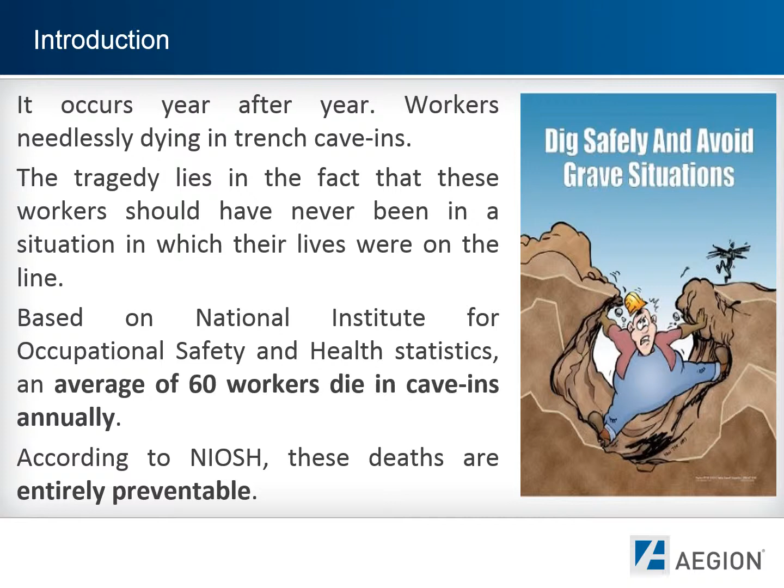Let's be clear, these events are not accidents, as cave-ins are both predictable and preventable.

Types of hazards: fatalities are usually caused by an absence of trench protection, as some employees may risk working in an unprotected trench to save time and money, cut costs, or due to supervisory pressure. A lack of knowledge is another factor - some employees are not aware of the hazards and precautions required to minimize the risk of a cave-in.

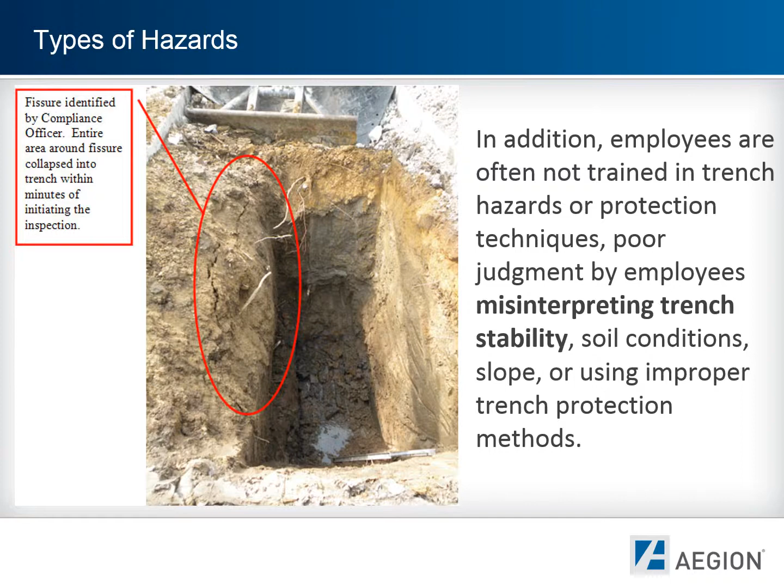In addition, employees are often not trained in trench hazards or protection techniques. Poor judgment by employees misinterpreting trench stability, soil conditions, slope, or using improper trench protection methods also contributes.

A cubic foot of soil generally weighs around 100 pounds or more. A cubic yard can weigh over 2,700 pounds, or as much as a small truck. Most workers don't realize the forces and impact associated with a cave-in.

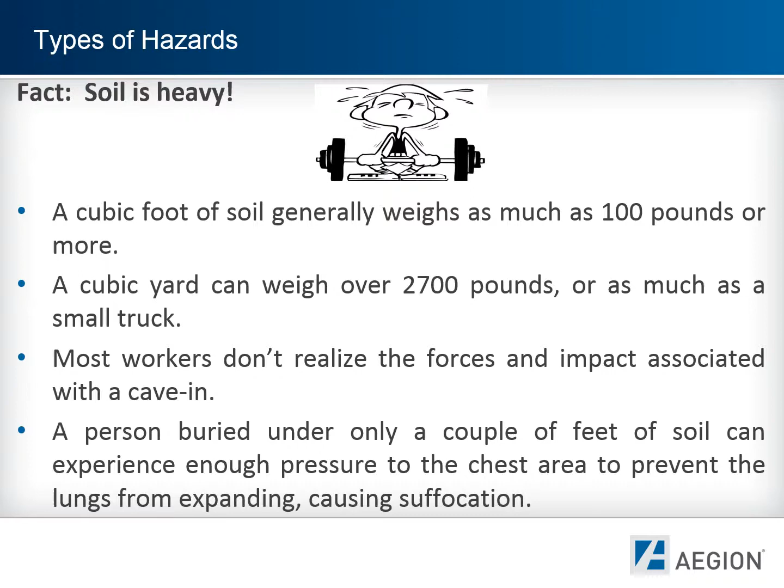A person buried under only a couple of feet of soil can experience enough pressure to the chest area to prevent the lungs from expanding, causing suffocation. Heavier soil and boulders can crush the body in an instant. It's no wonder trench cave-ins result in so many deaths and permanently disabling injuries.

Remember, while working in trenches and excavations, there is absolutely no room for risk-taking. Any condition you ignore or overlook can be fatal.

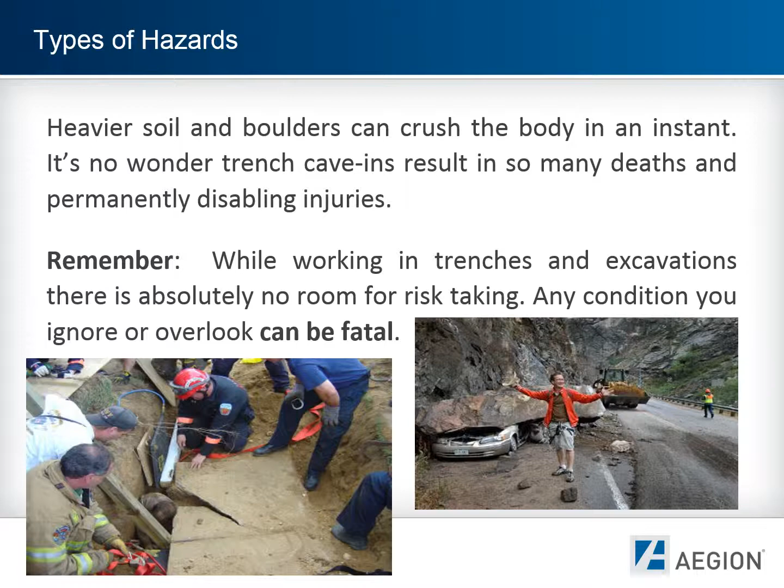Training is the key to working safely in trenches. Be sure that you participate in as much training as possible. It is imperative to read and understand the regulations regarding trenching and shoring. You can get a copy from your local OSHA office or by downloading the standards from the web.

Be sure to follow your company's procedures and carefully read and follow the applicable safety regulations and standards. If you do not understand any part of the standard or requirement, be sure to discuss it with your supervisor to ensure you have the knowledge to work safely.

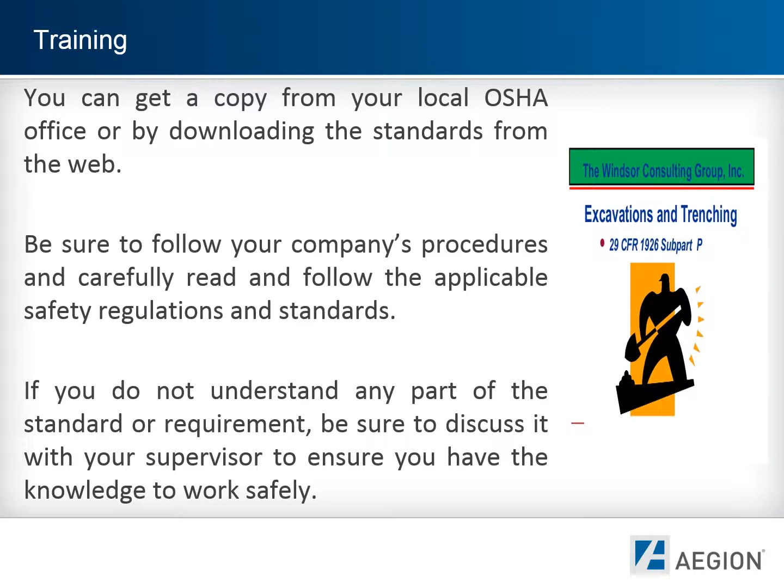Undisturbed soil is kept in place by natural forces as well as the cohesive properties of some soils. When soil is excavated, these forces change and can no longer hold back the open trench walls. Soon the laws of gravity take over, causing the trench walls to move downward and inward into the excavation, resulting in a cave-in.

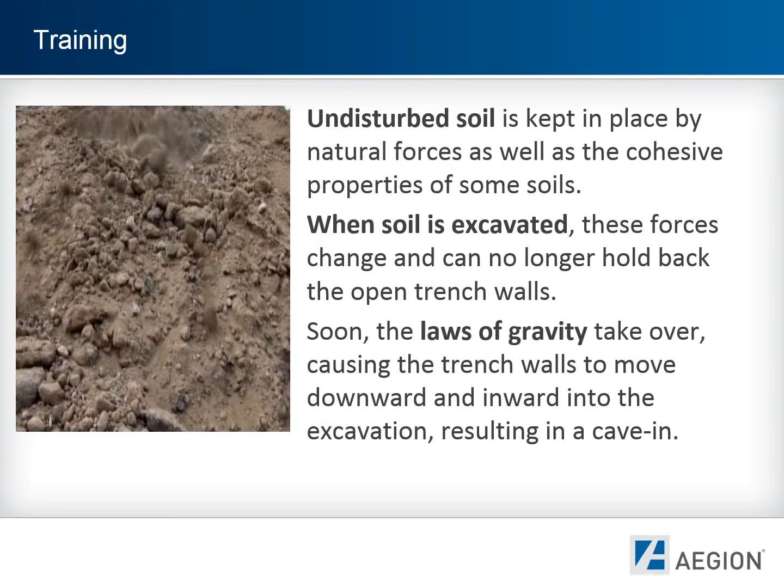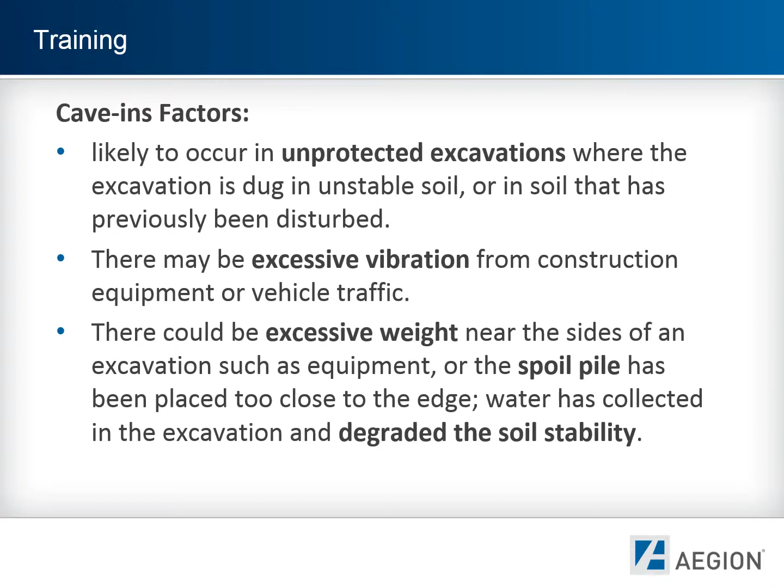Cave-in factors: likely to occur in unprotected excavations where the excavation is dug into an unstable soil or in soil that has previously been disturbed. There may be excessive vibration from construction equipment or vehicle traffic. There could be excessive weight near the sides of an excavation, such as equipment or the spoil pile has been placed too close to the edge. Water has collected in the excavation and degraded the soil stability.

Changes in weather conditions cause soil to become unstable - freezing, thawing, sudden heavy rain, or hot, dry weather.

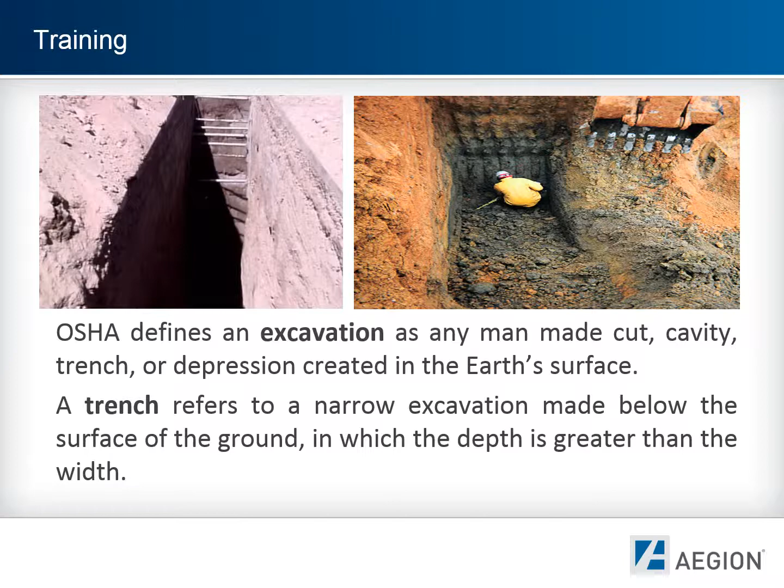OSHA defines an excavation as any man-made cut, cavity, trench, or depression created in the Earth's surface. A trench refers to a narrow excavation made below the surface of the ground, in which the depth is greater than the width.

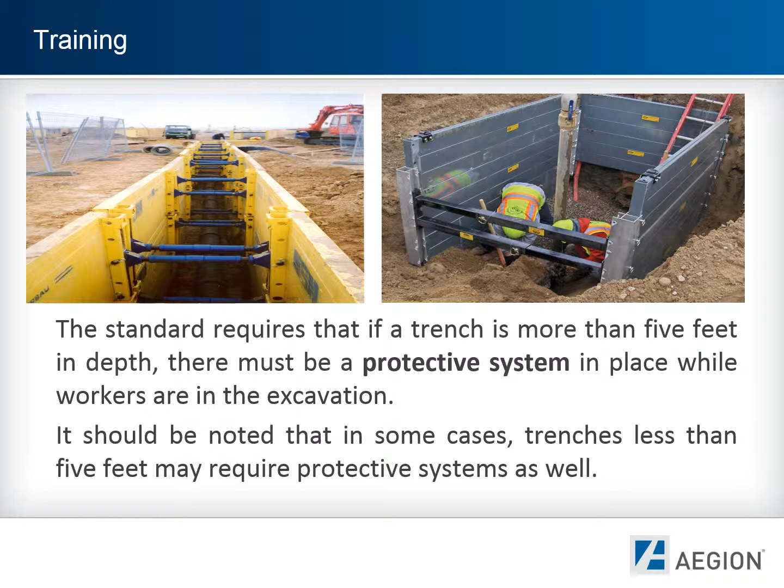The standard requires that if a trench is more than 5 feet in depth, there must be a protective system in place while workers are in the excavation. It should be noted that in some cases, trenches less than 5 feet may require protective systems as well.

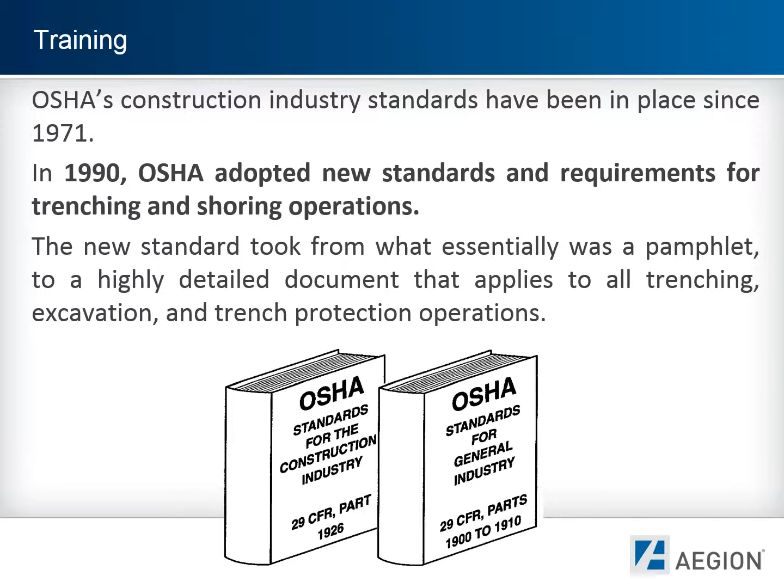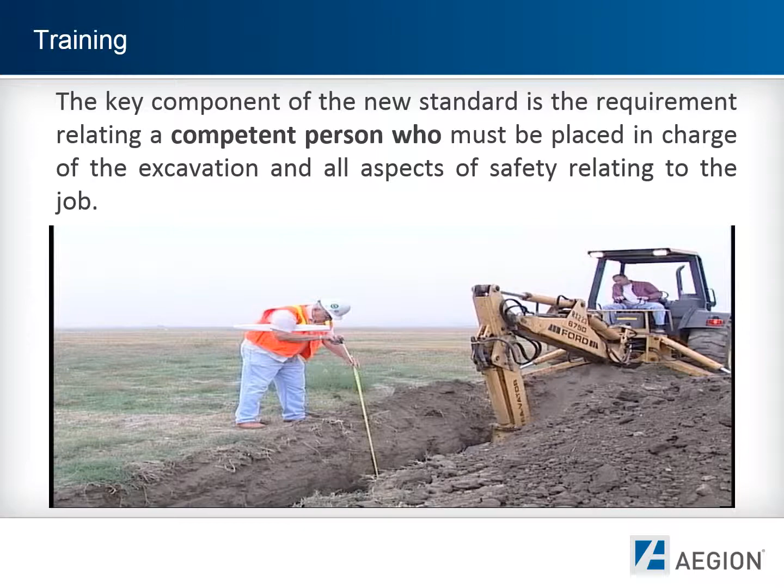OSHA's construction industry standards have been in place since 1971. In 1990, OSHA adopted new standards and requirements for trenching and shoring operations. The new standard took from what was essentially a pamphlet. The key component of the new standard is the requirement relating to a competent person, who must be placed in charge of an excavation and all aspects of safety relating to the job.

The term competent person is used commonly in many OSHA standards. However, this presentation is dedicated to the competent persons working in trenching and excavation operations.

Definition: a competent person is chosen by the employer who, by training and/or experience, is knowledgeable of applicable safety standards and is capable of identifying existing and predictable hazards in the surrounding and/or working conditions, which are unsanitary, hazardous, or dangerous to employees. One of the most important conditions is that the employee has been given the authority to take prompt, corrective measures to eliminate them.

The standard does not dictate that the competent person must be a supervisor, but common sense and organizational protocol would make this an excellent idea.

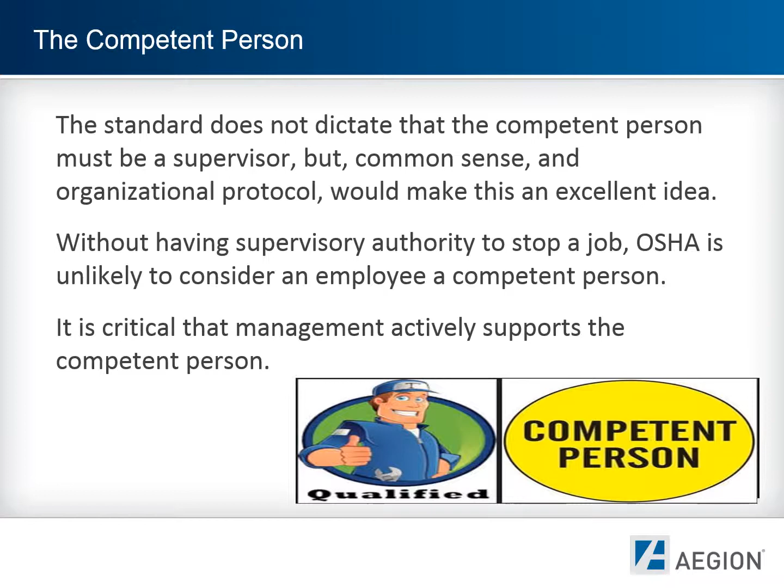Without having supervisory authority to stop a job, OSHA is unlikely to consider an employee as a competent person. It is critical that management actively supports the competent person.

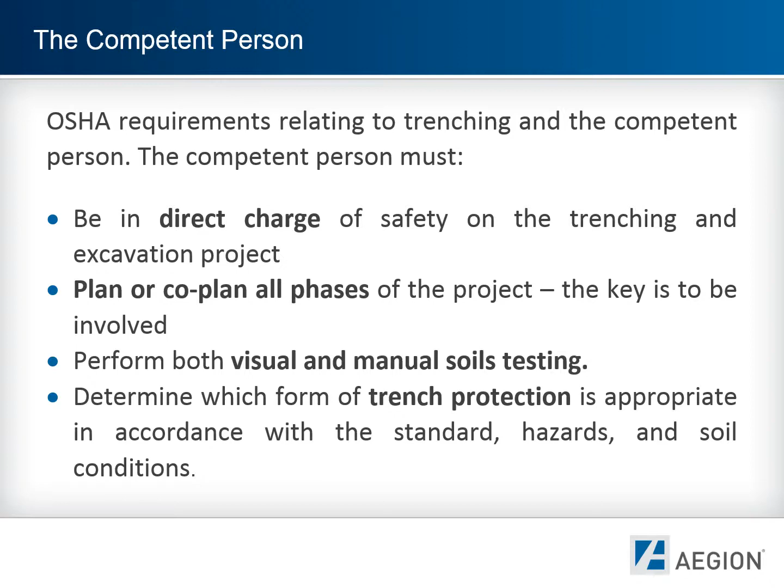OSHA requirements relating to trenching state the competent person must be in direct charge of safety on the trenching and excavation project, and plan or co-plan all phases of the project. The key is to be involved. They must perform both visual and manual soil testing, and determine which form of trench protection is appropriate in accordance with the standard, hazards, and soil conditions.

The competent person must conduct inspections at the excavation site at the beginning of the day, and periodically throughout the shift. Additional inspections must also be performed after any hazard-increasing event, such as rainstorm, freezes, thaws, traffic, or earthquake tremors.

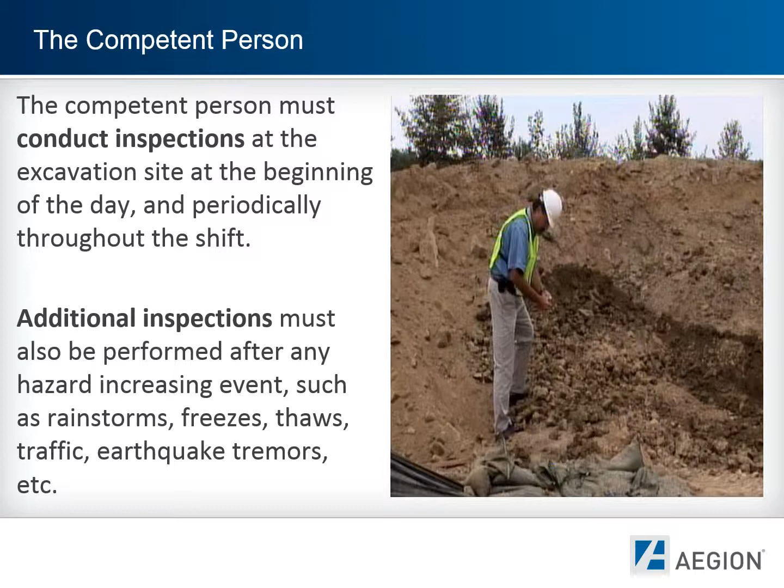A key aspect of the standard is the requirement for the competent person to conduct inspections daily and before the start of each work shift, as required by the work being performed, and after every rainstorm or other weather event that could adversely affect trench stability, such as snow, thaw conditions, windstorms, earthquake, or any other dramatic weather change.

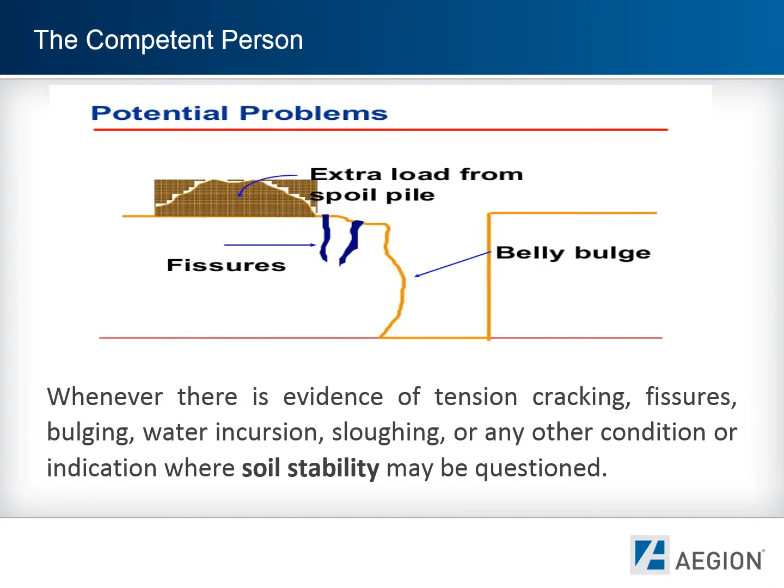A change in size, location, or placement of the spoil pile, or whenever there is evidence of tension cracking, fissures, bulging, water incursion, sloughing, or any other condition or indication where soil stability may be questioned.

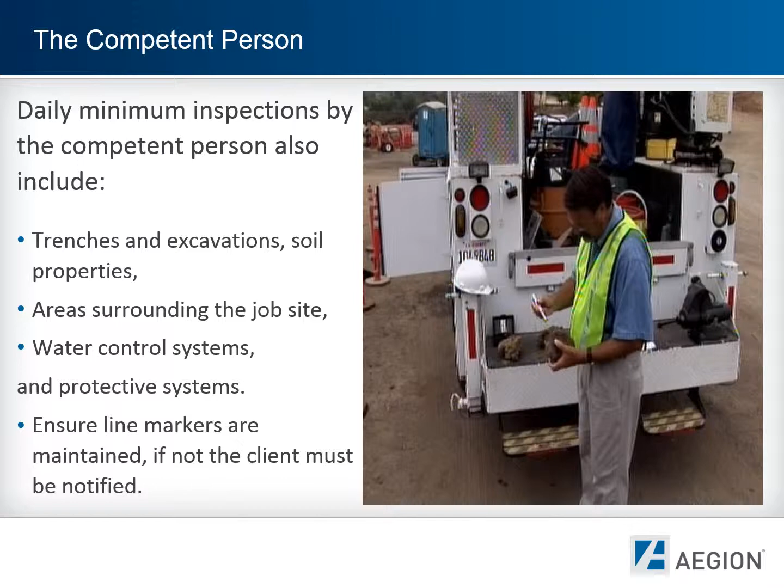Daily minimum inspections by the competent person must also include trenches and excavations, soil properties, areas surrounding the job site, water control systems, and protective systems. Ensure line markers are maintained. If not, the client must be notified.

The competent person must also assess the job site for any surface encumbrances, objects, or structures which could pose a hazard during the project. Examples might include trees, boulders, foundations, poles, pipelines or conduits, sidewalks, or anything that could get in the way of a safe trenching project.

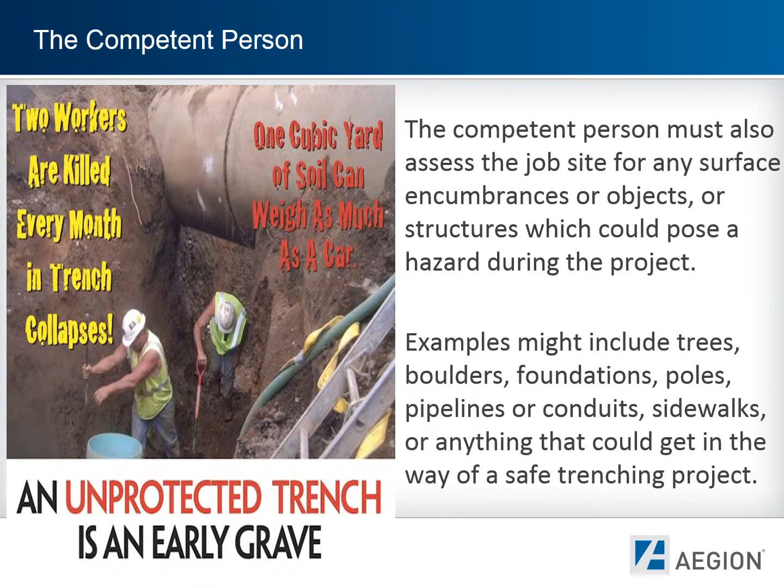Where there is evidence of a potential cave-in or other hazardous conditions, the competent person must remove the affected employees until the necessary precautions have been taken to ensure safety.

The competent person must also ensure that all underground utilities have been located. This is accomplished by having an active one-call ticket on site at all times. Remember, locators dispatched by utility companies can only provide approximate locations of their lines and systems. These lines will be marked accordingly. If the utility cannot be found as marked, stop and notify the client and utility company.

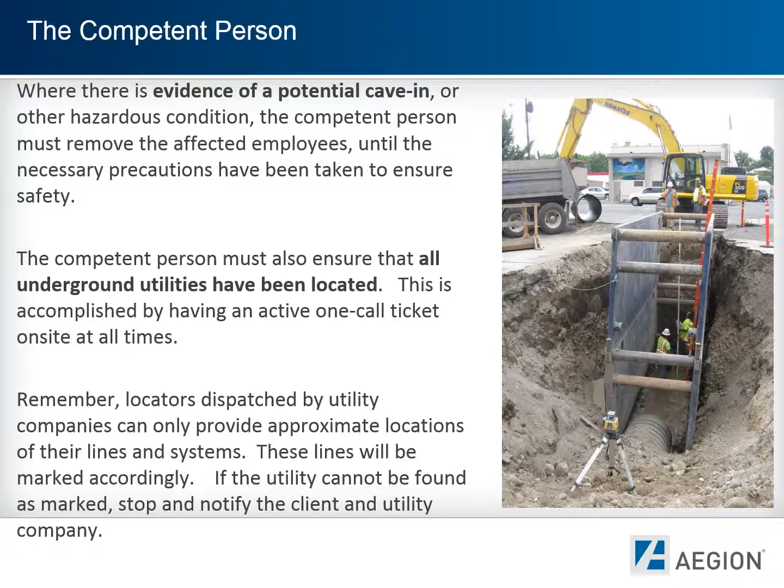Never use backhoes, breakers, digging bars, or other metal tools to locate or work around utilities due to the electrocution or spark potential. If you uncover an unmarked utility line, stop and notify the client and your supervisor.

The competent person is responsible to ensure that ladders, ramps, and/or stairways are provided for all excavations 4 feet or more in depth. Secure ladders must be placed every 25 feet of lateral travel, and must extend at least 3 feet above the top of the excavation.

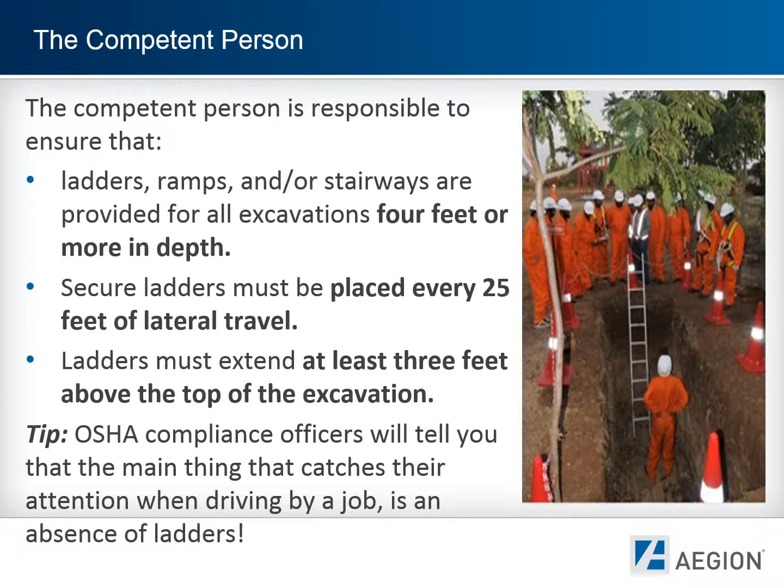Tip: OSHA compliance officers will tell you that the main thing that catches their attention when driving by a job is an absence of ladders.

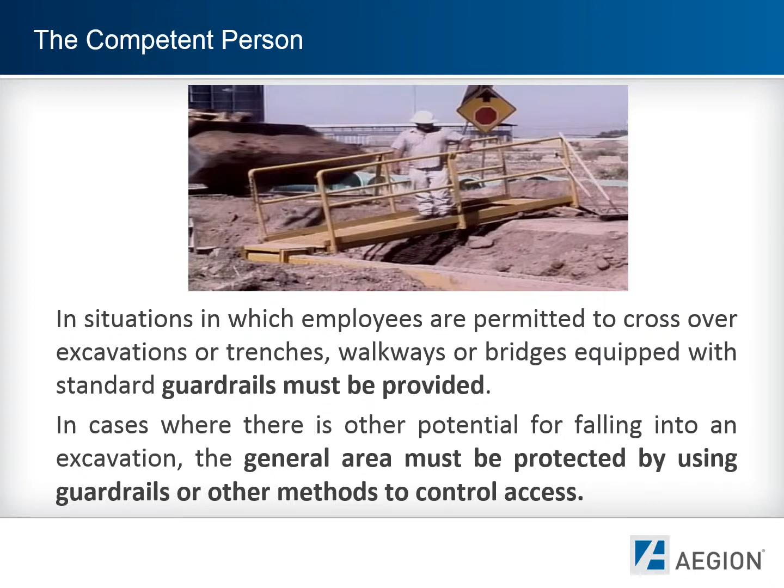In situations where employees are permitted to cross over excavations or trenches, walkways or bridges equipped with standard guardrails must be provided. In cases where there is other potential for falling into an excavation, the general area must be protected by using guardrails or other methods to control access.

The standard states, when working in trenches deeper than 4 feet in locations where hazardous atmospheres are likely to be present, atmospheric testing, ventilation, and respiratory protection must be provided. The competent person will need to determine if there are any risks of a hazardous atmosphere on the worksite and ensure that testing is conducted if the trench qualifies as a confined space.

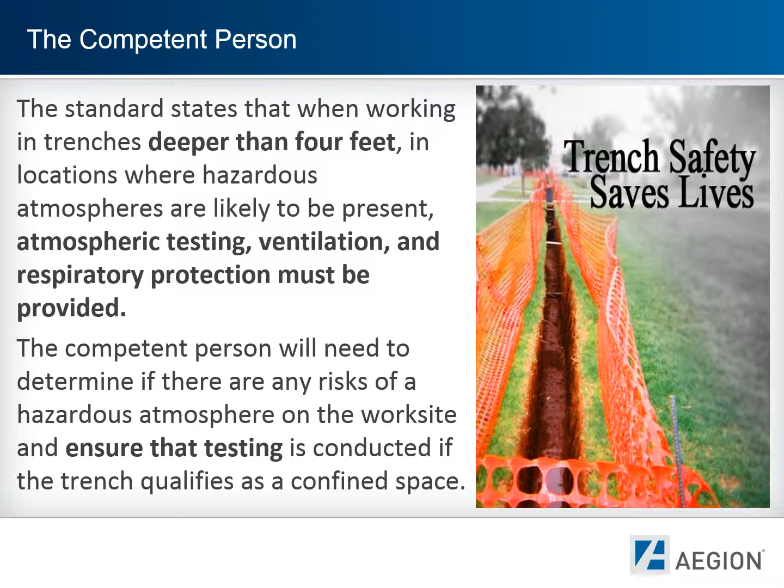Water accumulation: the competent person is also required to assess the job to determine if water accumulation may occur in the trench, and to take adequate steps to de-water and properly support the trench walls. Water accumulation and removal must be supervised, monitored, and inspected by the competent person to ensure adequate water control. Heavy rain will require more frequent inspections and controls to ensure safety.

Soil inspection: let's take some time to talk dirt. As a competent person, you must also conduct an analysis of the soil to determine its classification as required by the standard. The classification will help you determine the appropriate trench protection measures to choose. The very first thing you must do in order to classify soil is simply look at it and handle it.

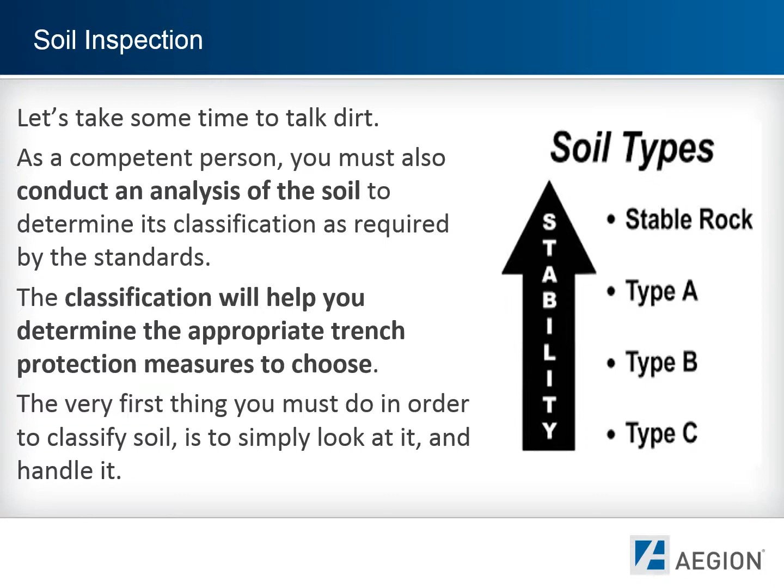That's right, get your hands dirty.

You will be conducting an examination to visually determine soil condition. Per the general requirements of the regulation, a competent person must type or classify the soil by using at least one visual and one manual test.

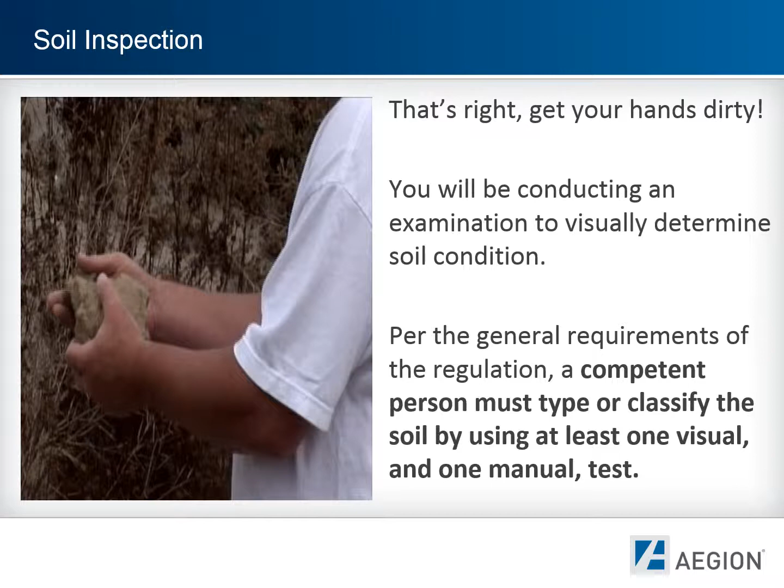A visual test should include observing the soil as it is being removed and examining the spoil pile, looking for clues to help you determine the soil classification.

Begin by going to the spoil pile and pick up a number of clumps of soil. By the way, never take samples from within the wall because it's just too dangerous.

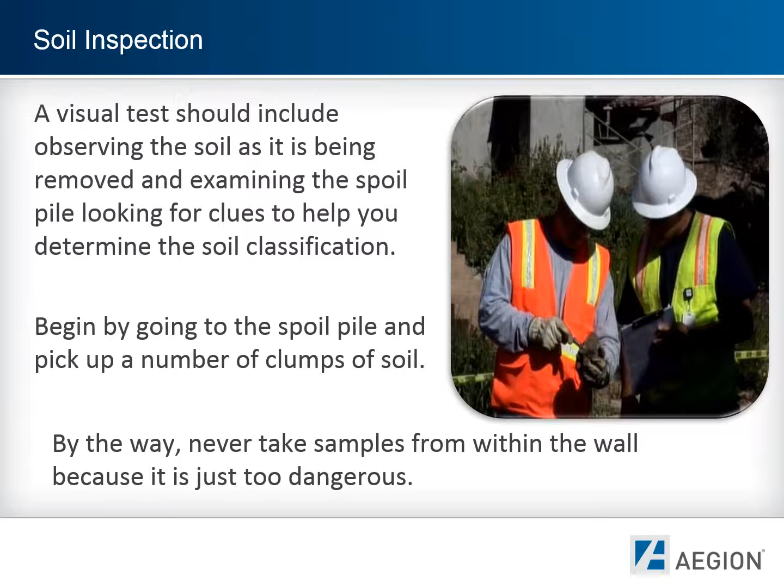Look for evidence of the type of soil. Does it appear as clay, sand, granular, or silt? Look at the size of the individual grains of soil. Are they large, small, clumped, or smooth?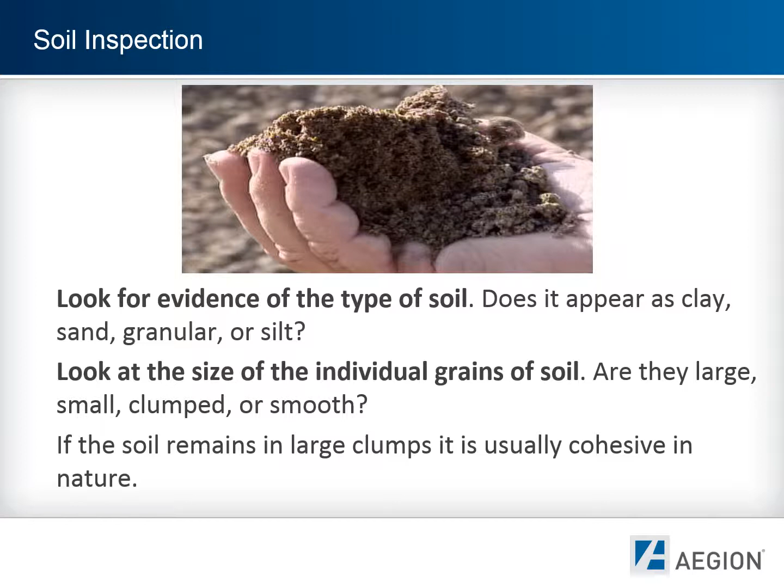If the soil remains in large clumps, it is usually cohesive in nature. Soil that breaks up easily and does not stay in clumps may be granular.

Is the soil wet, saturated, or submerged? Basically, you are trying to determine if the soil content has a high degree of clay or sand. This gives you a clue as to the ability of the soil to remain stable.

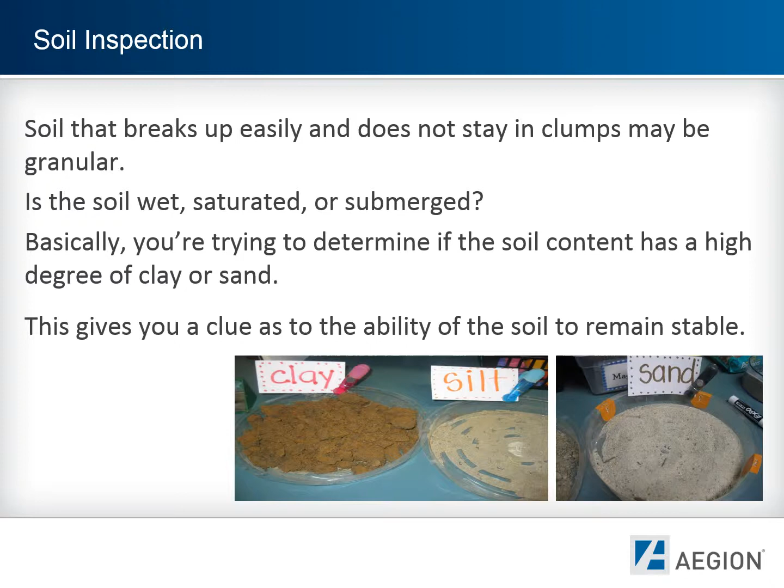Soil is generally a mixture of sand, gravel, silts, clay, water, and air. The amount and makeup of these ingredients determines its cohesiveness, or how well the soil will hold together.

Cohesive soil does not crumble. It usually can be molded easily when moist and is hard to break up when dry.

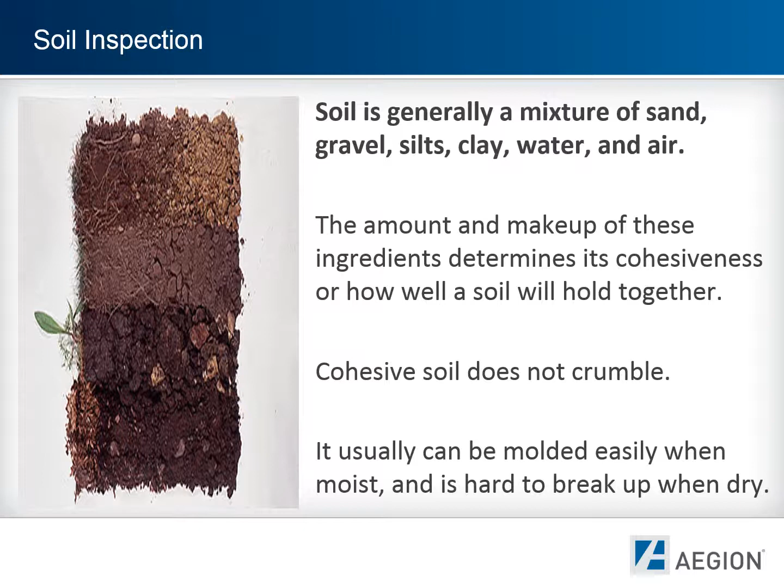When you observe clay, it appears as very fine-grained soil and is very cohesive or sticky. Generally speaking, the more clay that is in the soil, the better the trench walls will hold up. Calcium carbonate also may be present and may provide a cemented property as well.

Granular soil may have little or no clay content and has little or no cohesive strength. Granular material cannot be molded when moist and crumbles easily when dry. Sand and gravel or coarse-grained soils have little cohesiveness and are often called granular.

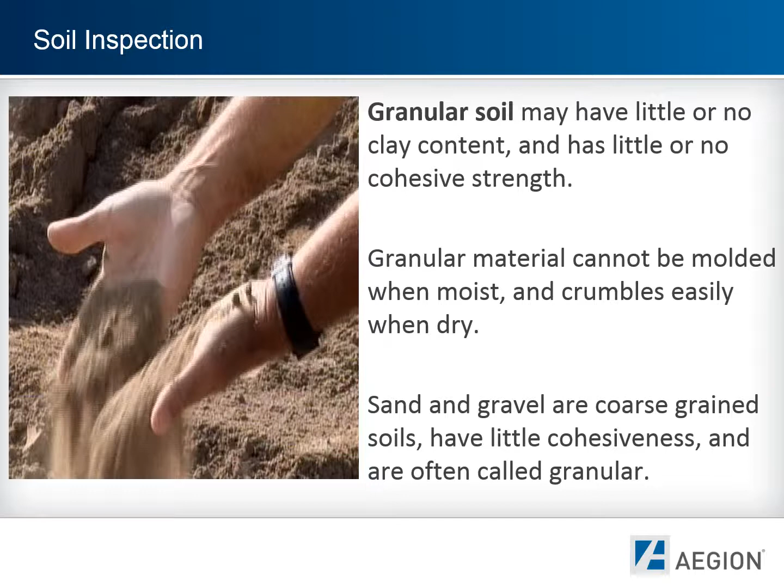Another factor in soil cohesion is water. Soil that is filled with water is termed saturated. Saturated soil generally does not hold together well and is particularly dangerous in excavation work. However, the opposite can also be true. Soil that has little or no water in it can crumble easily and may not hold together when excavated.

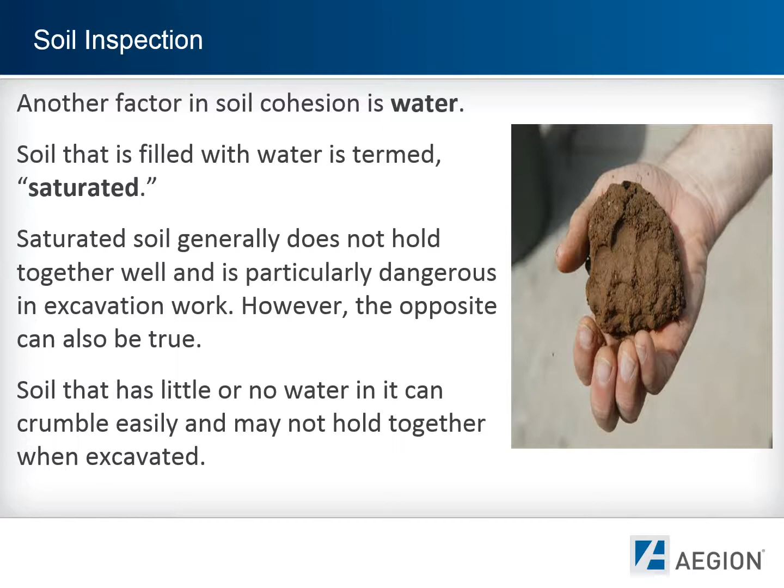Next, observe the size of the excavation, looking for cracks or fissures or other evidence of moving ground. Also look for layered soil types. Determine if layers slope towards the excavation and estimate the degree of sloped layers.

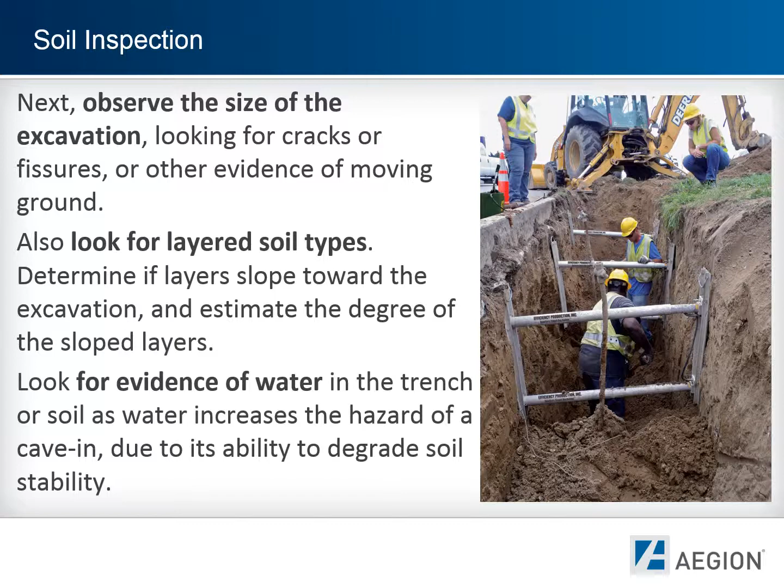Look for evidence of water in the trench or soil, as water increases the hazard of a cave-in due to its ability to degrade soil stability.

Look for sources of vibration. Carefully check the surrounding area for sources of vibration and other hazards that may affect stability.

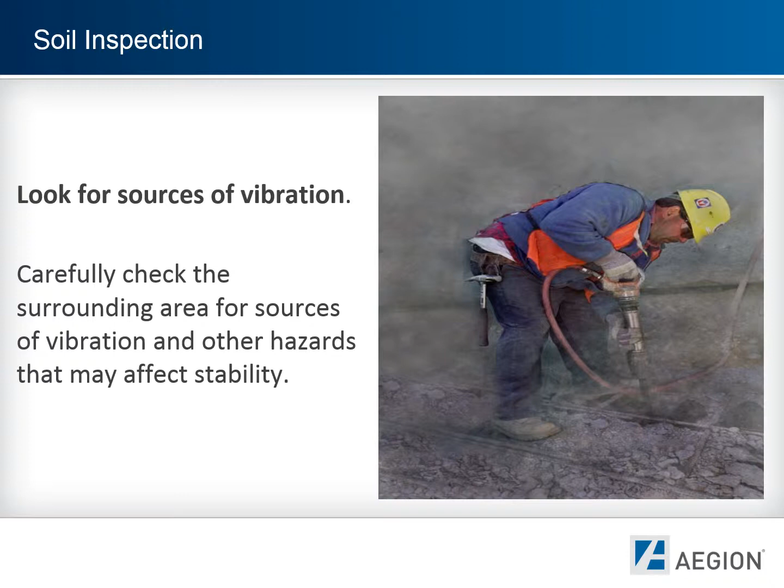Soil classifications. OSHA classifies soil in 4 categories: stable rock, type A, type B, and type C. As a competent person, you will also be performing the classification in order to help choose the proper trench protection technique or system. The classification must be based on at least one visual and one manual soil test.

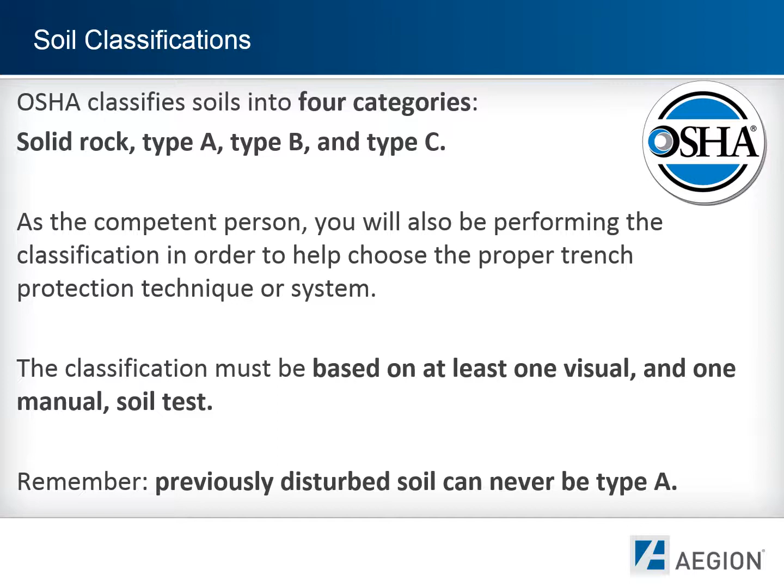Remember, previously disturbed soil can never be type A. Solid rock is the most stable. Type C soil is the least stable.

Soils are classified not only by how cohesive they are, but also by the conditions in which they are found. Stable rock is rarely found in the excavation of a trench. This is because excavation of rock typically requires cutting, drilling, and blasting, which fractures the rock, making it less stable.

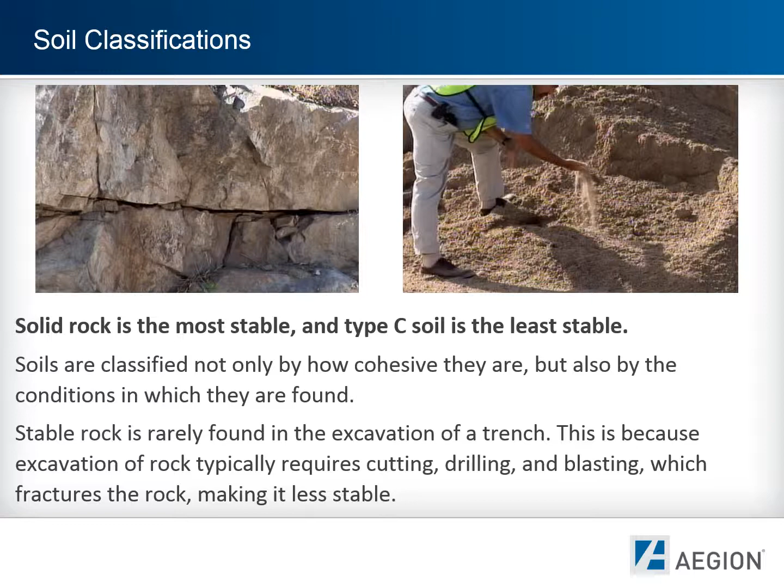Type A soil will generally be made up of clay, silty clay, or sandy clay. Many OSHA compliance personnel believe that construction equipment at the site creates enough vibration to prevent any soil from being typed as Class A.

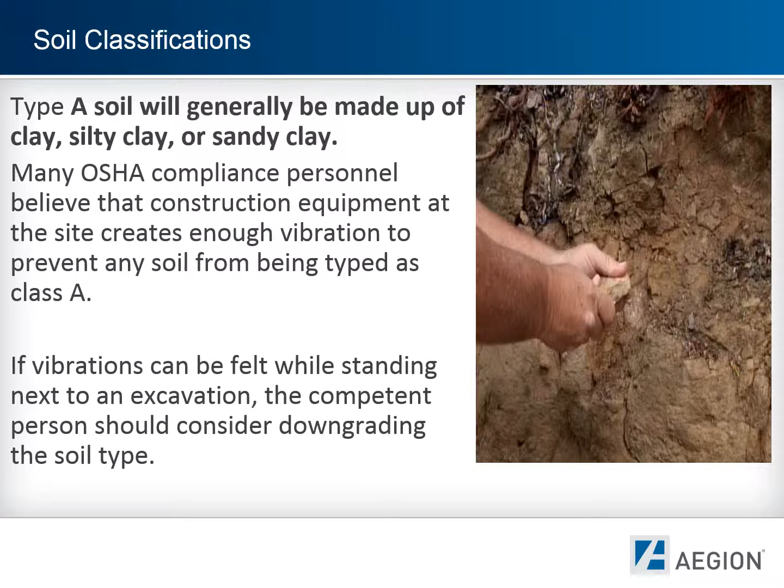If vibrations can be felt while standing next to the excavation, the competent person should consider downgrading the soil type. A soil cannot be considered type A if it is fissured, has cracks, or other conditions that can adversely affect stability, vibration from heavy traffic, pile driving, or similar effects.

Having been previously disturbed or excavated, or as part of a layered system where less stable soil is near the bottom of the excavation, with the more stable soil on top, subject to other factors which would make it unstable, such as the presence of groundwater or freezing and thawing conditions.

Type B soils include both cohesive and non-cohesive soils. They include silts, sandy loams, medium clays, and unstable rock. Soils that may be classified as A but have fissures or are subject to vibration may also be classified as B soils.

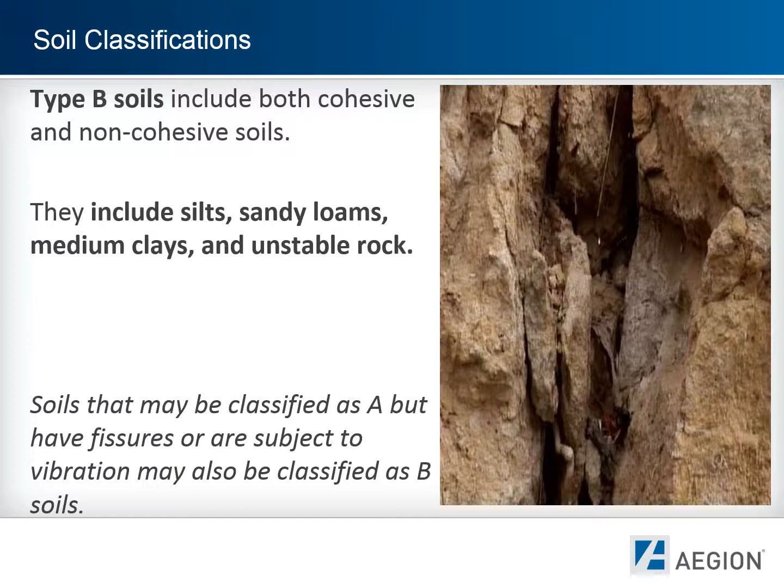Type C soils are the most unstable and therefore the most dangerous of the four soil types. They are usually easily recognized by the continual sloughing of the sides of the walls of the excavation. If soil is submerged or water is seeping from the sides of the excavation, it is very probably type C soil.

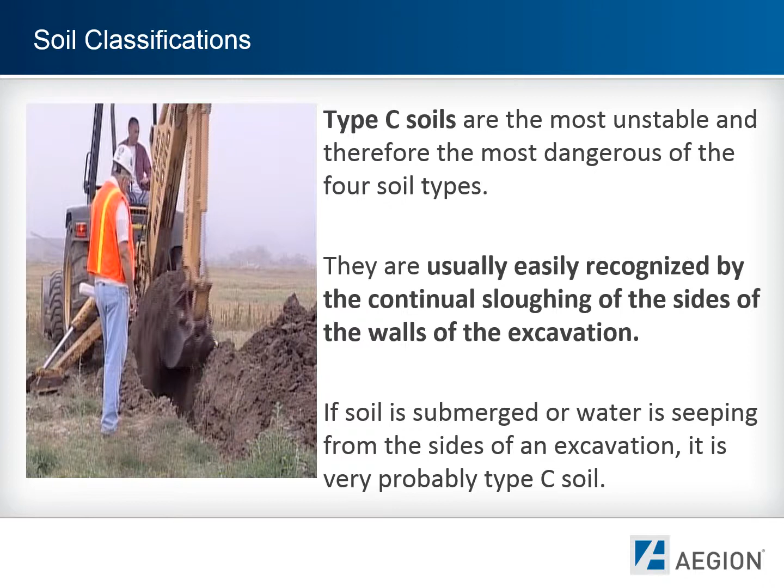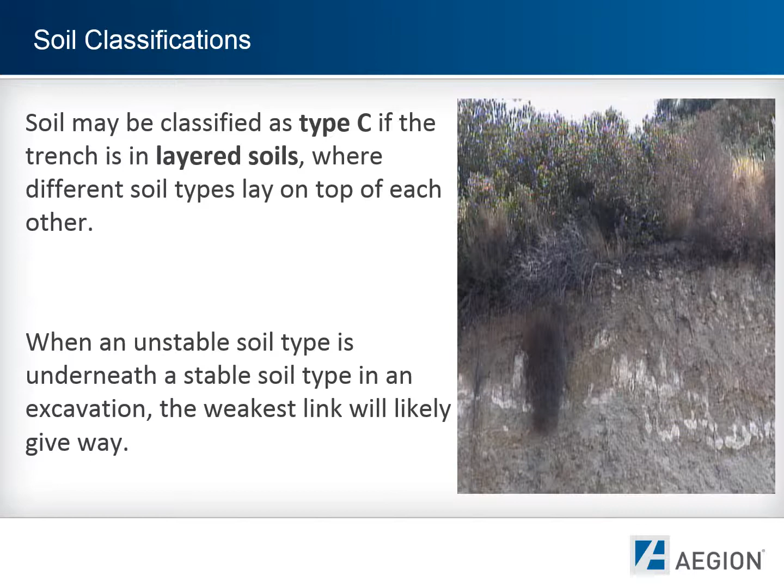Soil may be classified as type C if the trench is in layered soils, where different soil types lay on top of each other. When an unstable soil type is underneath a stable soil type in an excavation, the weakest link will likely give way.

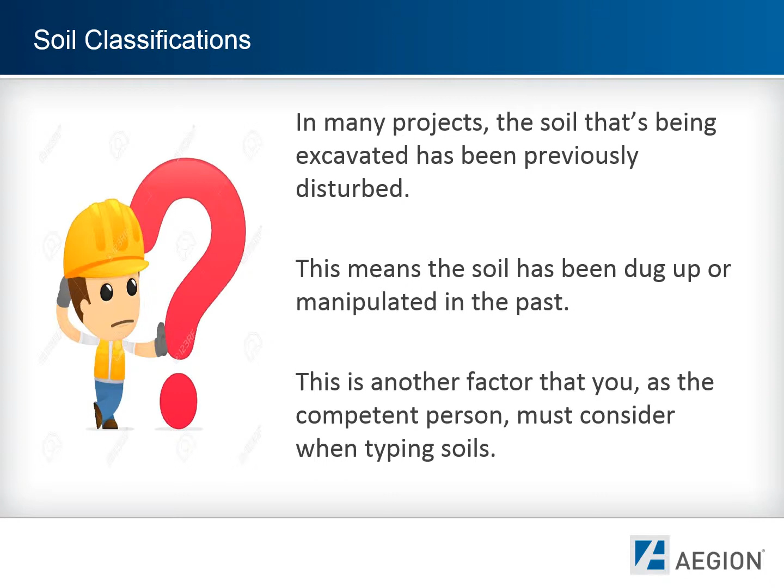In many projects, the soil that is being excavated has been previously disturbed. This means the soil has been dug up or manipulated in the past. This is another factor that you, as the competent person, must consider when typing soils. Previously disturbed soil is commonly found above existing utilities such as water, sewer, and electrical and gas lines. This makes work around these utilities far more dangerous due to the unstable nature of the soil. This could also apply to lots where the soil has been disturbed in order to construct homes.

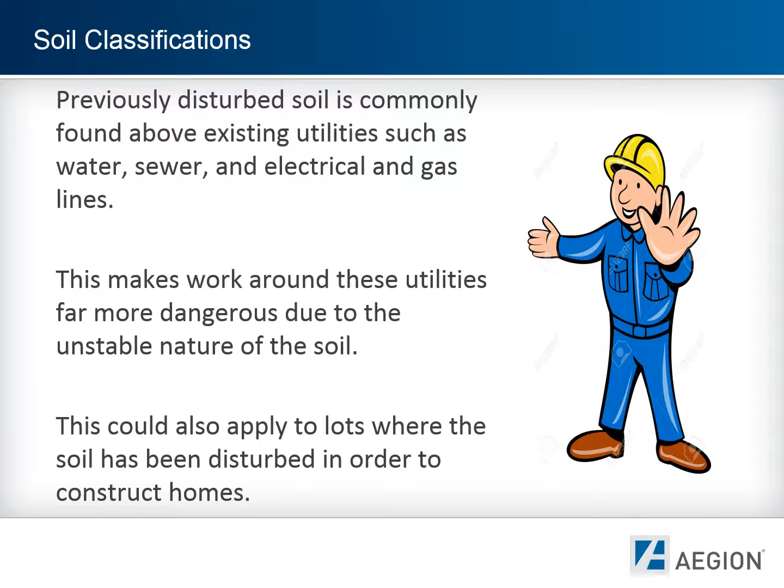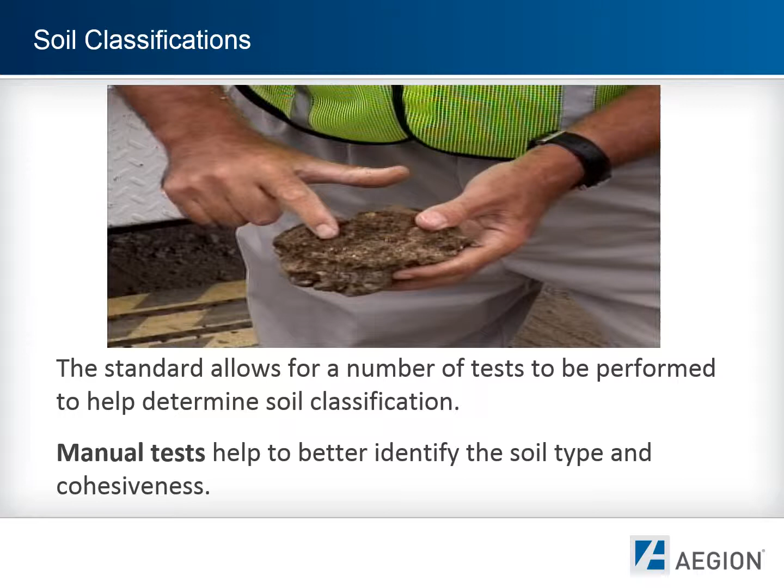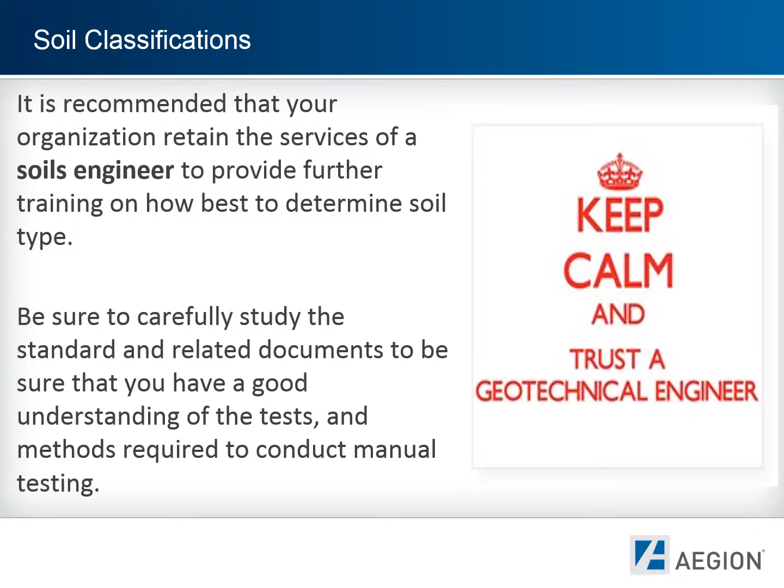The standard allows for a number of tests to be performed to help determine soil classification. Manual tests help to better identify the soil type and cohesiveness. It is recommended that your organization retain the services of a soils engineer to provide further training on how to best determine soil type. Be sure to carefully study the standard and related documents to be sure that you have a good understanding of tests and methods required to conduct manual testing.

Regardless of the methods used, the typing of soils must be done by the competent person prior to anyone entering the excavation. The weaker or less stable the soil, the greater the need for protective systems. Remember, no one should ever be allowed to enter the trench to perform the testing or take soil samples.

A manual test means working with the soil with either your hands or with an instrument designed to measure soil strength.

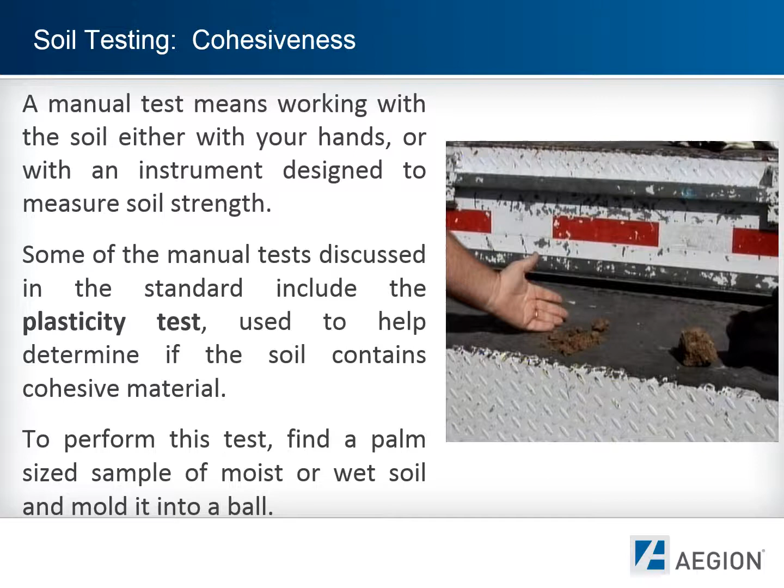Some of the manual tests discussed in this standard include the plasticity test, used to help determine if the soil contains cohesive material. To perform this test, find a palm-sized sample of moist or wet soil and mold it into a ball. Then attempt to roll it into threads about 1/8 of an inch in diameter. If the soil contains cohesive properties, it can usually be rolled into threads without crumbling.

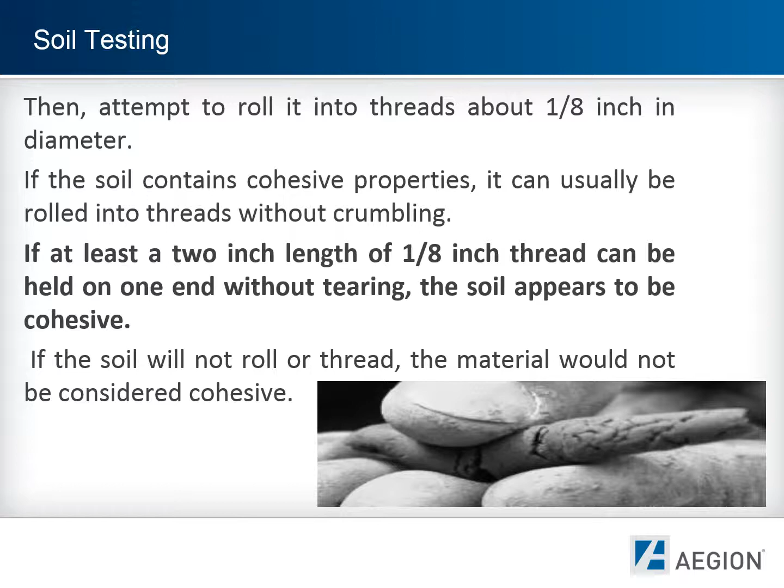If at least a 2-inch length of 1/8 inch thread can be held on one end without tearing, the soil appears to be cohesive. If the soil will not roll or thread, the material would not be considered cohesive.

Another plasticity test is known as the ribbon test. It is conducted in a similar manner, but rather than rolling into a thread, a larger roll is used and squeezed between the thumb and forefinger. If it ribbons around the hand, it may contain a sufficient amount of clay to be considered cohesive.

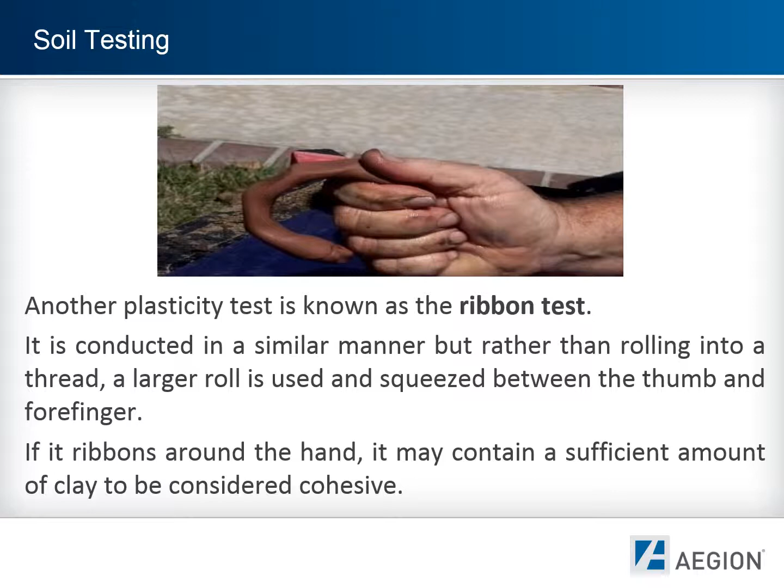Another test is known as the dry strength test. To conduct this test, get an undisturbed sample from the spoil pile. Undisturbed means that you are testing it as you found it, and have not added water or disturbed it in any other way. Now use your thumb and fingers to apply light to moderate pressure to the sample.

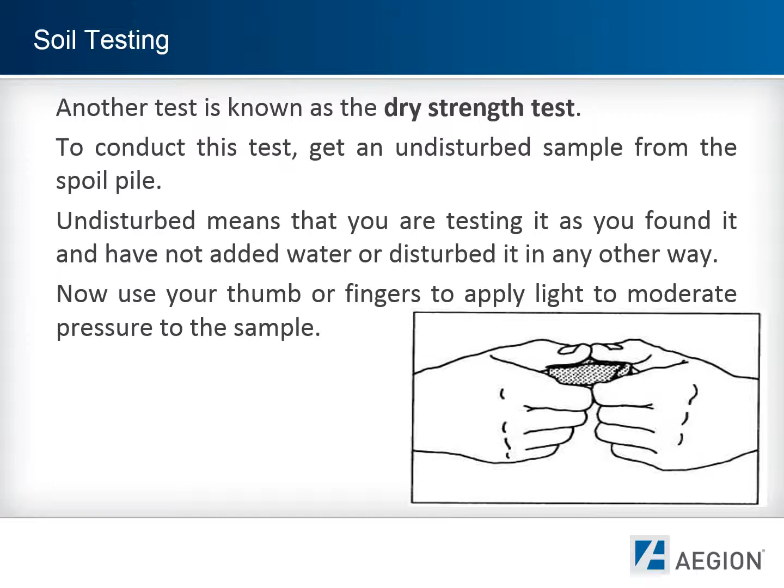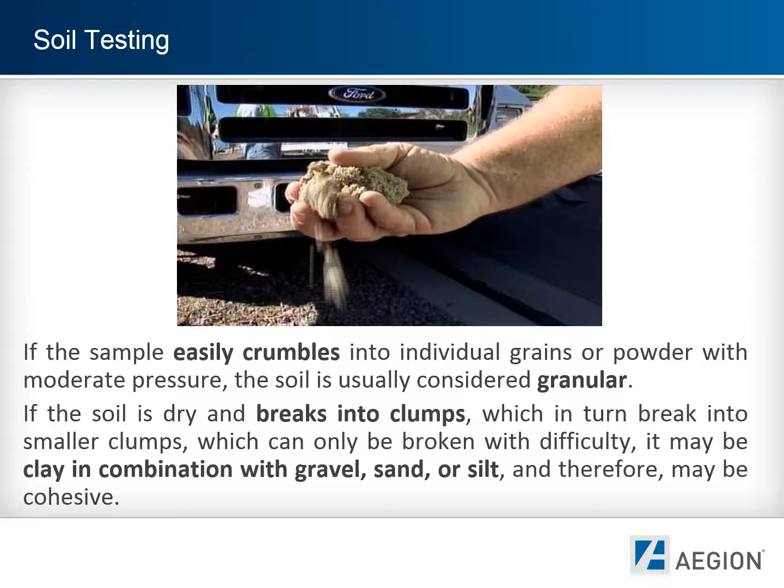If the sample easily crumbles into individual grains or powder with moderate pressure, the soil is usually considered granular. If the soil is dry and breaks into clumps, which in turn break into smaller clumps, which can only be broken with difficulty, it may be clay in combination with gravel, sand, or silt, and therefore may be cohesive.

The thumb penetration test can be used to estimate the unconfined compressive strength of cohesive soil material and classification. When performing the thumb penetration test, it must be done on an undisturbed excavated soil sample, such as a lump of material about the size of a baseball. This test should be performed as soon as possible after excavation, so as to reduce the effects of drying or additional water.

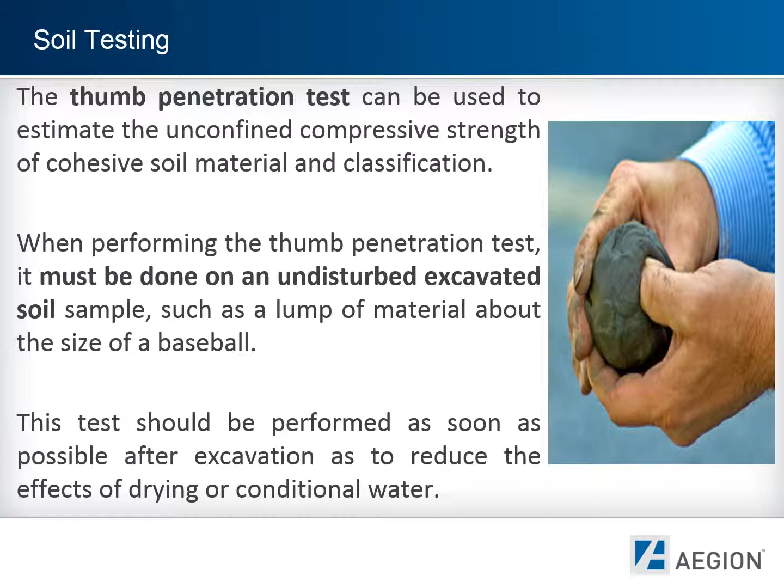Soil testing type A: begin pressing your thumb into the sample. Using just thumb pressure, if you cannot penetrate the sample or just barely indent the soil, the standard indicates it might be type A soil. Type A soils have an unconfined compressive strength of 1.5 tons per square foot or greater, and cannot readily be penetrated by thumb pressure.

Soil testing type B. Type B soils are those with 0.5 to 1.5 tons per square foot of unconfined compressive strength, and can generally be penetrated by the first joint of the thumb.

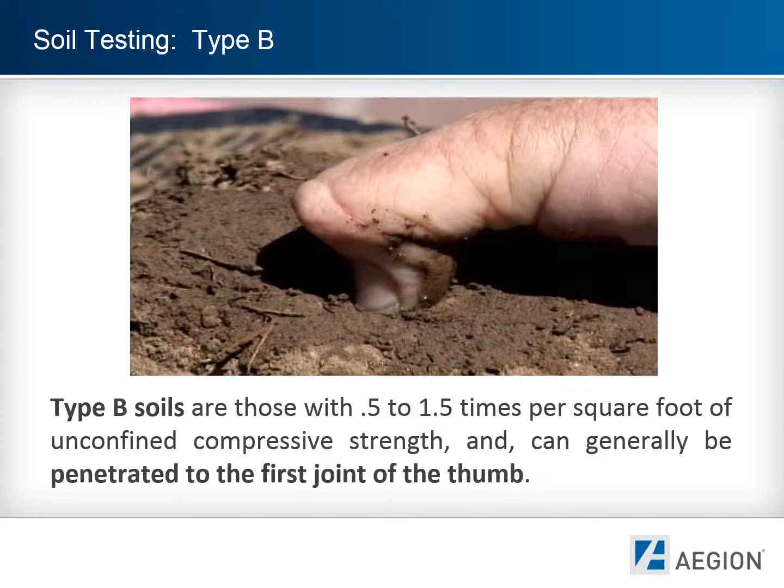Soil testing type C. Type C soil has an unconfined compressive strength of 0.5 tons per square foot or less, and can easily be fully penetrated by the thumb, and can be molded by light finger pressure. However, be aware the major concern with using the thumb penetration test is that you have no hard data to support your findings, should you need to defend your position at an OSHA hearing.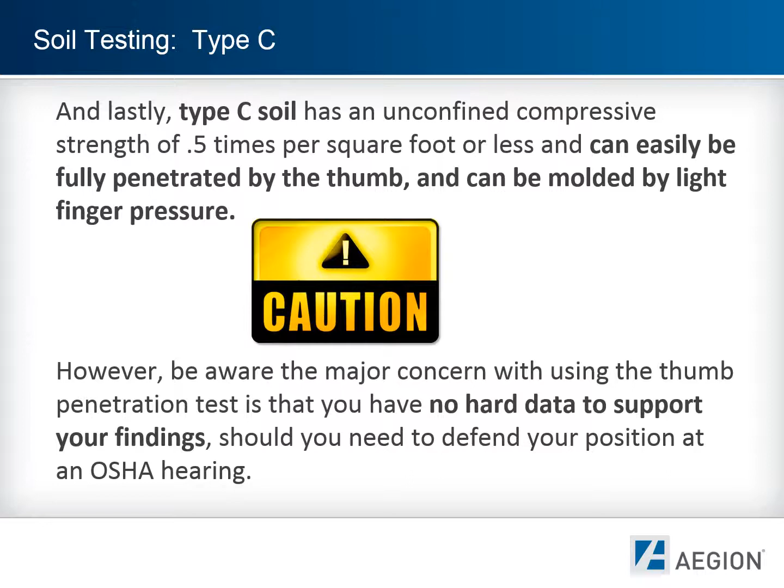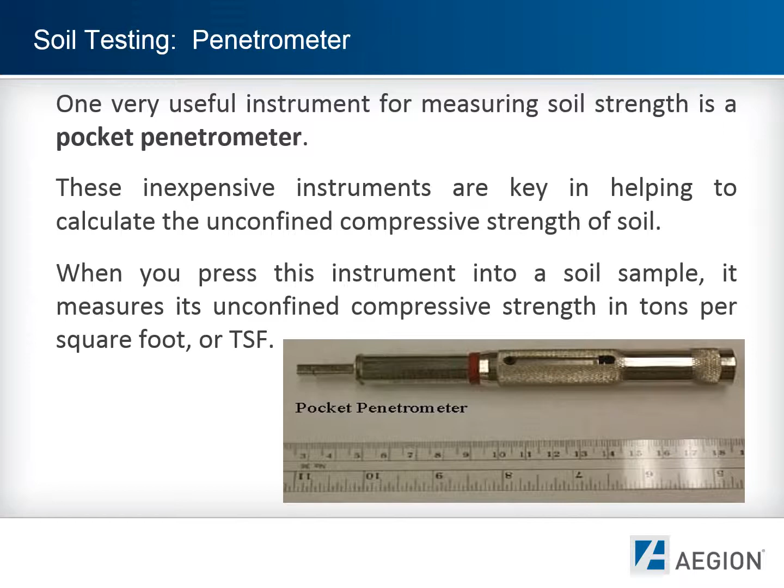Soil testing penetrometer. One very useful instrument for measuring soil strength is a pocket penetrometer. These inexpensive instruments are key in helping to calculate the unconfined compressive strength of soil. When you press this instrument into the soil sample, it measures its unconfined compressive strength in tons per square foot, or TSF.

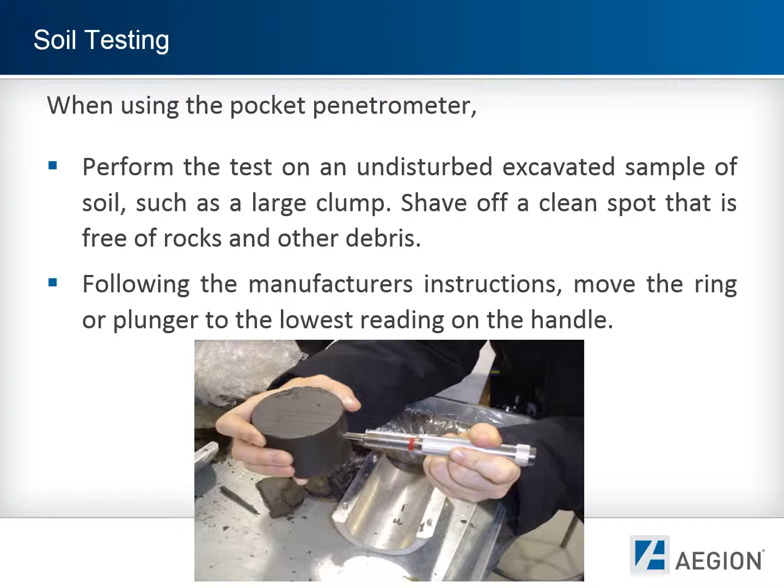When using the pocket penetrometer, perform the test on an undisturbed excavated sample of soil, such as a large clump. Shave off a clean spot that is free of rocks and other debris. Following the manufacturer's instructions, move the ring or plunger to the lowest reading on the handle. Grip the handle and with steady pressure, push slowly until the soil reaches the marking on the piston, about 1/4 inch from the end. Read the unconfined compressive strength in tons per square foot on the indicator.

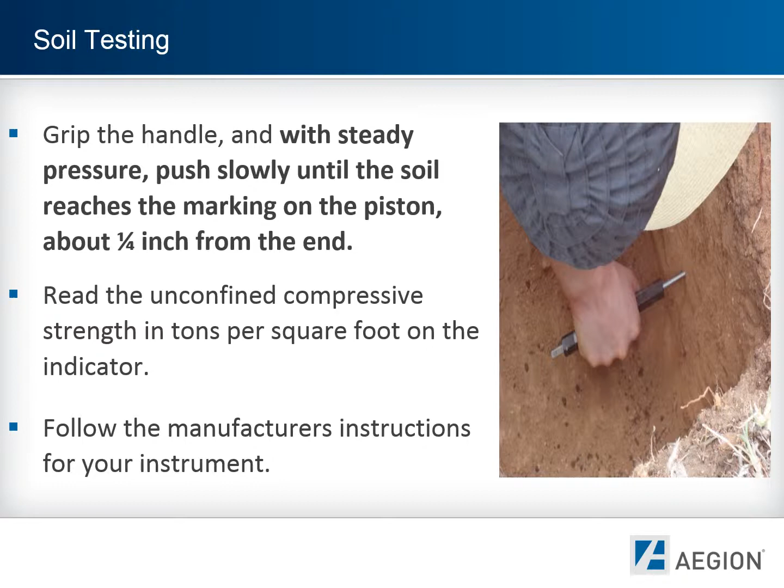Follow the manufacturer's instructions for your instrument. Take 8 to 10 readings and take an average of the findings to come up with a final calculation as to the unconfined compressive strength. Make sure to document the findings in the event you have to prove them to a compliance officer.

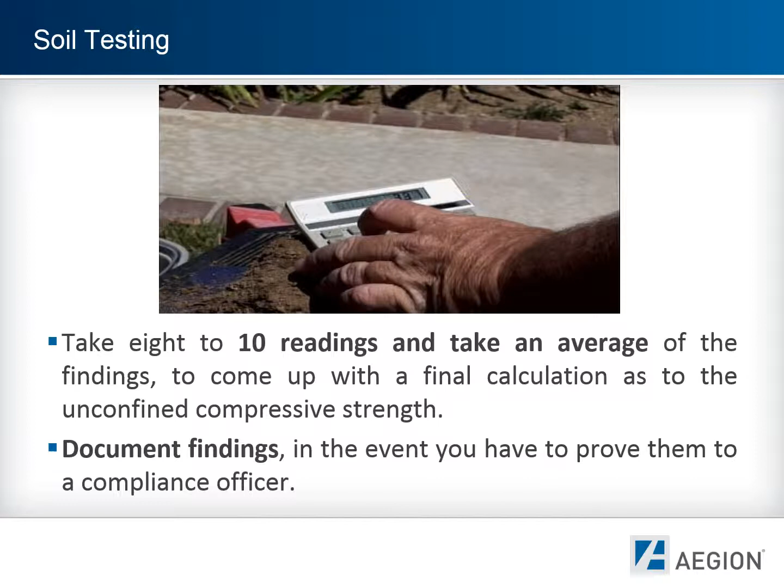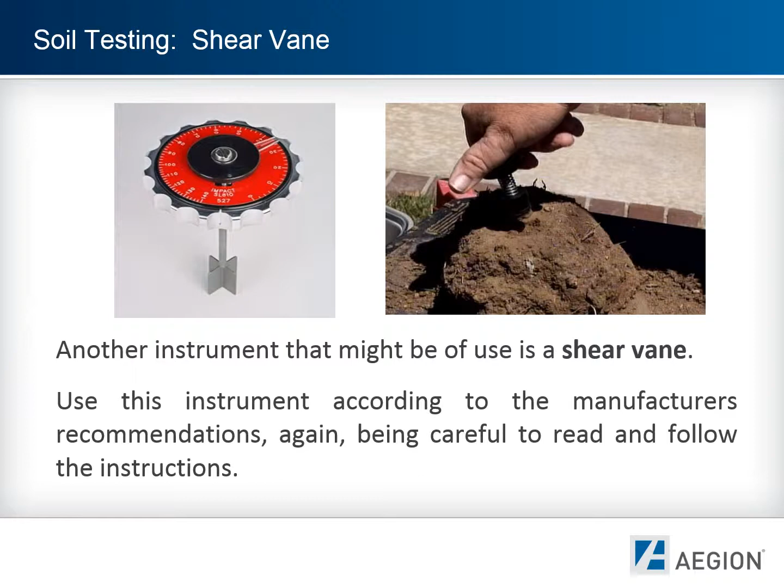Soil testing, shear vane. Another instrument that might be of use is a shear vane. Use this instrument according to the manufacturer's recommendations, again being careful to read and follow the instructions. Since the shear vane measures shear strength, as opposed to unconfined compressive strength, you will need to double the number to get the correct result. Again, take a number of samples and calculate an average.

Soil testing, drying test. The drying test may be used, but the basic purpose is to differentiate between cohesive material with fissures, unfissured cohesive material, and granular material. This test is to be conducted by a qualified individual.

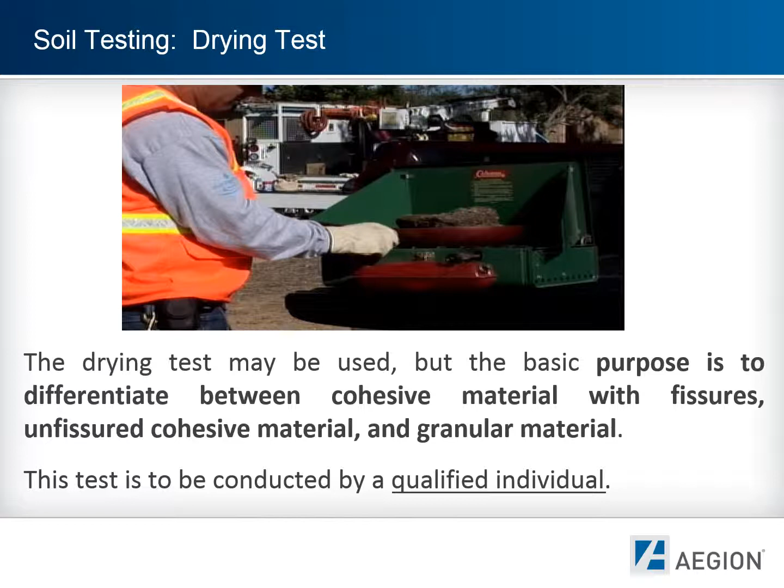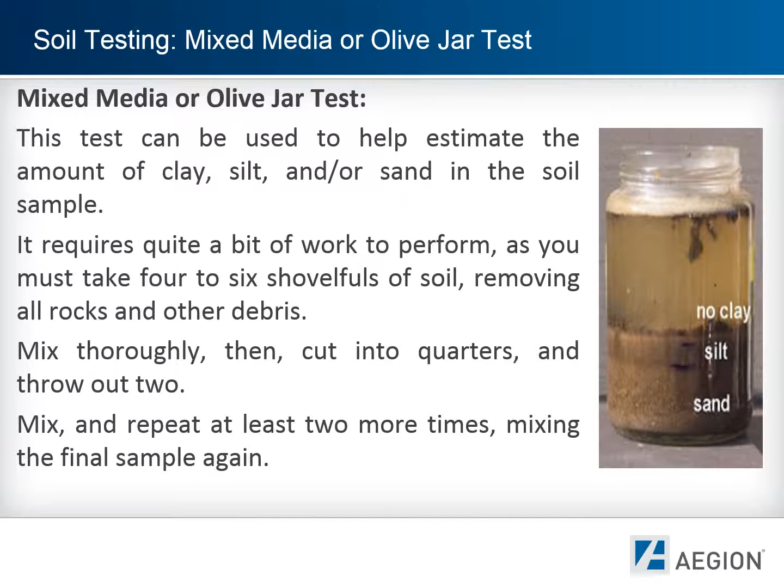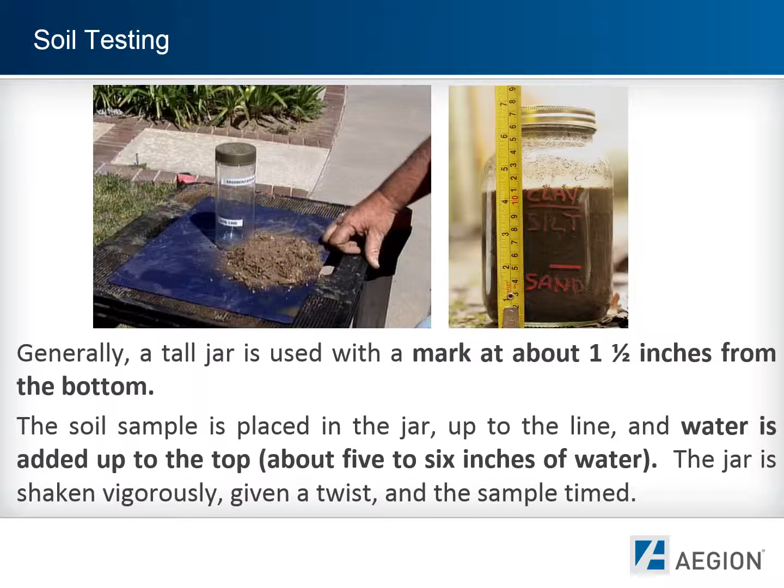Generally, a tall jar is used with a mark about 1½ inches from the bottom. The soil sample is placed in the jar up to the line and water is added to the top, about 5 or 6 inches of water. The jar is shaken vigorously, given a twist, and the sample is timed. The types of soil within the jar will dictate how quickly they settle out.

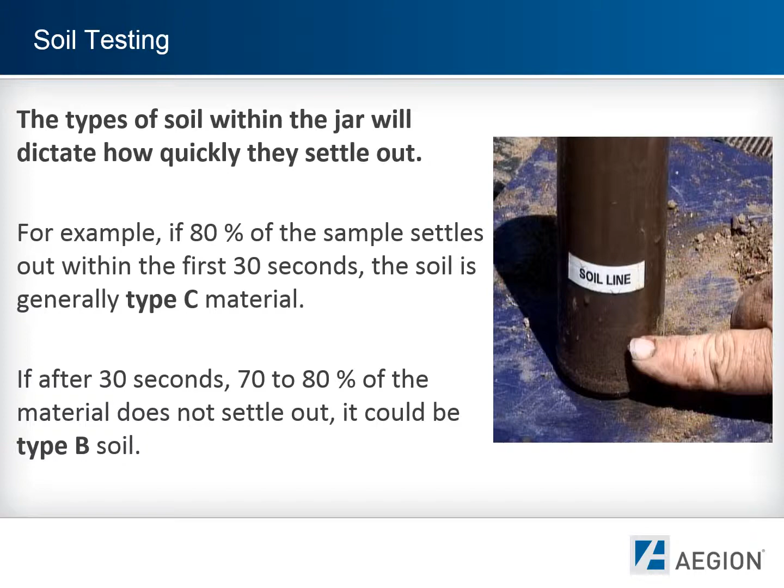For example, if 80% of the sample settles within the first 30 seconds, the soil is generally type C material. If after 30 seconds, 70 to 80% of the material does not settle out, it could be type B soil.

Soil testing classification. Once you have determined the soil classification, you will now be able to use this information to help determine the appropriate transportation and support measures for workers. Consult the standard and tables within the standard that correspond to the soil classification. You will be choosing between a shoring system, sloping or benching, and/or trench box system.

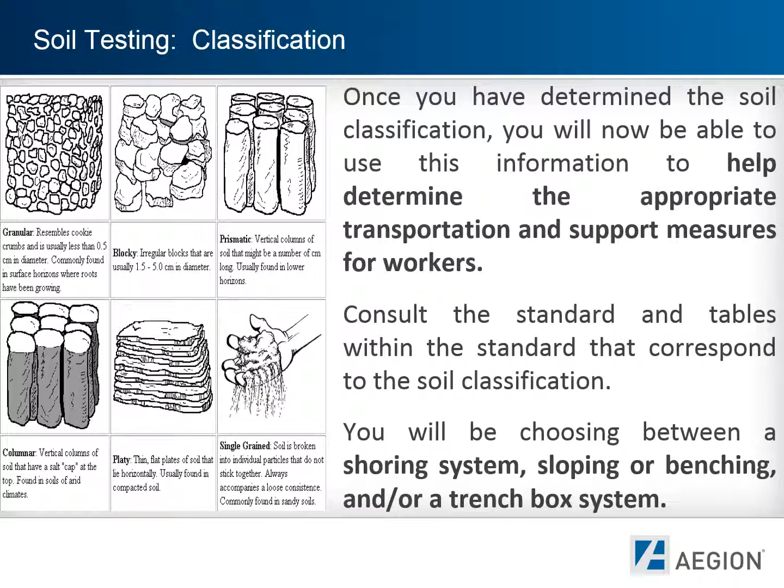Conclusion. As you have seen, being a competent person is not for the faint of heart. The job carries a lot of responsibility. Let's face it, the lives of your coworkers depend upon your professionalism and dedication to safety. This short presentation cannot do justice to the amount of technical and safety training you will need to be a top-notch competent person. Talk to your supervisor about scheduling more training in the requirements of a competent person, trenching and shoring, as well as general safety.